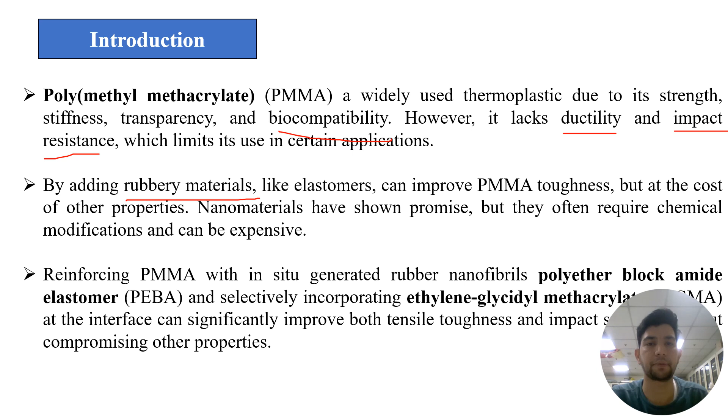So we can improve this property by adding a rubbery material like an elastomer, so it will improve toughness, but the other properties will be lost. But in this paper the author added an elastomer and also a compatibilizer, and the interesting thing was that it improves one property and the other property is not reduced. That is the good point. So reinforcing PMMA with in situ generated rubber nanofibrils polyether block amide elastomer and selectively incorporating ethylene glycidyl methacrylate at the interface can significantly improve both tensile toughness and impact strength without compromising other properties.

The main thing is that PMMA is a very good polymer, it is a thermoplastic, highly stiff, but the ductility is not good. So if we want to increase the ductility of PMMA or any polymer, we will add some elastomer. If we add elastomer, the ductility will increase, but the strength and stiffness will decrease. By increasing one property, the other will decrease. So that is the issue. In this paper, the author tried to improve ductility and never lost the stiffness. That is the interesting thing.

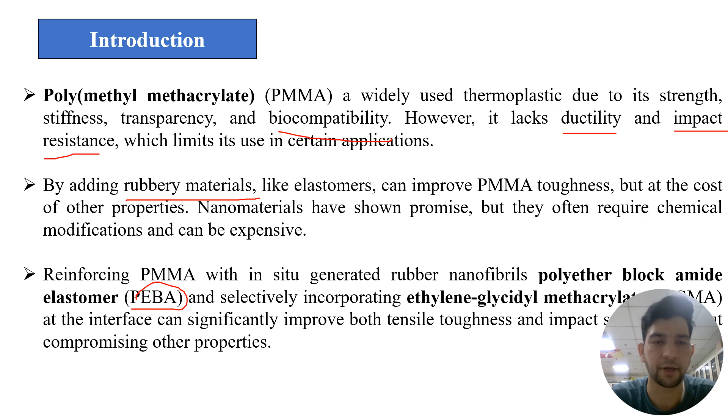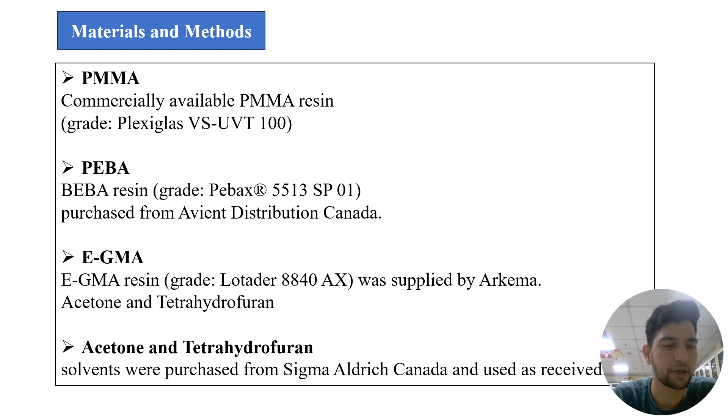Materials and method. So the materials used in this paper are PMMA, PEBA, EGMA, acetone and tetrahydrofuran. Experimental procedure. The experimental procedure of this paper is very interesting, very good. So preparation of nanofibril composite and blend. In the processing, in the first step he used twin screw compounding. This is the twin screw extruder, having a 27 millimeter screw.

Okay, so first of all he takes PMMA, PEBA and EGMA. He dries these three components at 90 degrees centigrade for 48 hours, and after that combines these three polymers and adds them. Okay, first of all let's explain this thing. What is this? This is a twin screw extruder. We are using this to make a polymer blend. In this portion, this is the feed hopper. We can add the material which we want to melt, so we add the material here.

Furthermore, it comes to this barrel. This barrel contains the screws. These screws are rotating and mix the material with each other well. This barrel contains heaters in different portions, on both sides. It is cylindrical, so the heater is around the barrel. Different heaters have different temperatures. At the end, this is the extrusion die. The polymer which is made will be removed. So finally we understand what this is and how it works.

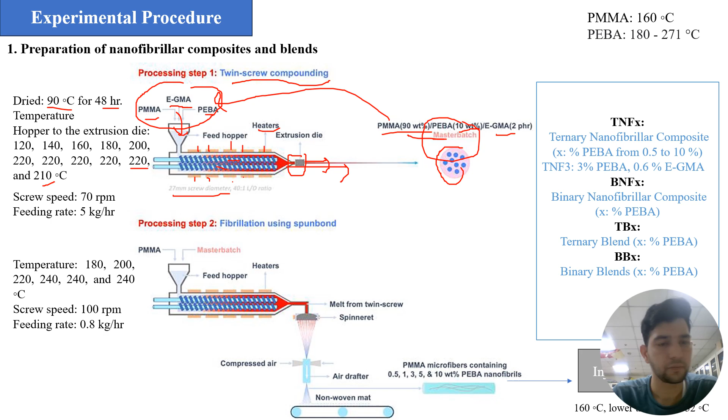So in the first step he tried to make a master batch. In the master batch the concentration of PMMA, PEBA and EGMA is different, and this concentration can be controlled from here. So he makes the master batch, and when the author adds the sample here, the screw rotates, which is measured in RPM. The speed of the screw is 70 RPM and the feeding rate is 5 kg per hour.

After making the master batch, he tried to make fibrils using a spun bond system. This is the same screw extruder, but they have this portion where we convert spherical droplets of the minor component to fibers. That's why this is called a spun bond twin screw extruder.

Okay, let's talk about this. The obtained master batch we first dry at 90 degrees centigrade for 48 hours, and also PMMA, and then the same process here, we add to the feeding hopper, and the temperature ranges from 180 to 240 degrees centigrade. The screw speed is 100 RPM and the feeding rate is 0.8. So after melt mixing, the polymer blend will go out.

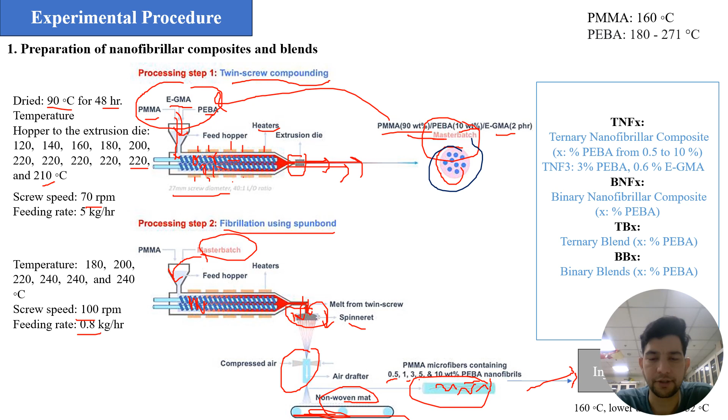Here actually the picture is there, the video is there, so that's why it is hidden, but I will try to explain. This is injection molding. The author does it at 160. There are 3 components, but the main components are 2, PEBA and PMMA. PMMA melts at 160, while PEBA has a higher melting point, so it will not melt. So the PEBA fibers will not be disturbed, while PMMA we can reshape. So he made many samples.

First of all, TNFX, ternary nanofibril composite. It contains 3 components. X represents the percentage of PEBA from 0.5 to 10. If we put 3, it means 3% PEBA, 0.6% EGMA, and the remaining 97% PMMA. BNFX, same X represents PEBA percentage. Binary nanofibril composite means it contains only 2 components, PMMA and PEBA.

And TBX, X represents PEBA, and this is a ternary blend with no fibers. And then BBX, binary blend with X percentage of PEBA, which contains only two components, PEBA and PMMA, and no other component like EGMA. Okay, here a question arises: how did he make these?

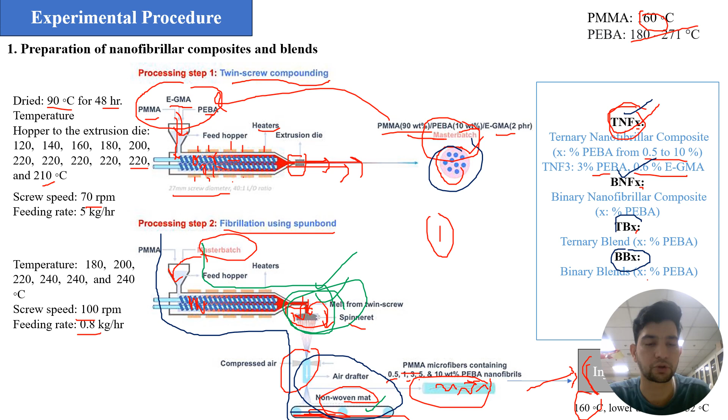If he combines with EGMA and also stops here, they will contain spherical PEBA and spherical EGMA inside the matrix. But if he goes up to this one, then definitely in this portion the spheres will convert to fibers.

Actually the screen is very small, so that's why I need to look like this.

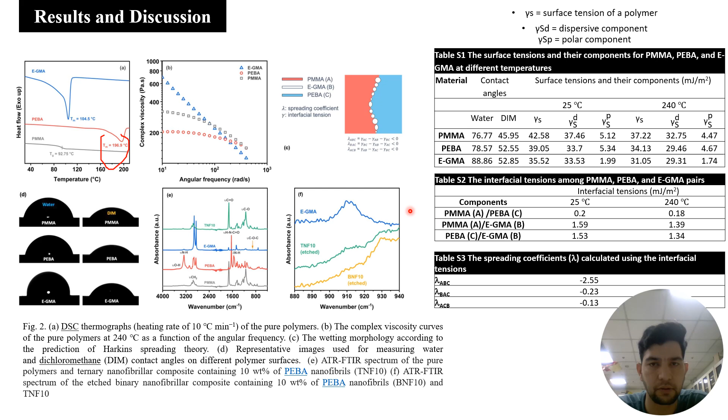Furthermore, figure 2e presents the ATR-FTIR spectrum, attenuated total reflectance Fourier transform infrared spectroscopy. This is the same graph as the previous slide; I just took a screenshot and pasted it in the next slide to explain in detail.

So these ATR-FTIR measurements were conducted to study potential chemical reactions during high temperature melt blending of PMMA, PEBA and EGMA. Figure 2e shows the ATR-FTIR spectrum, in which some important absorption peaks are identified. In PMMA, the absorption peak at around 1723 wavenumber is related to the ester carbonyl group C=O. Other peaks are related to CH2 and so on, but this is very important.

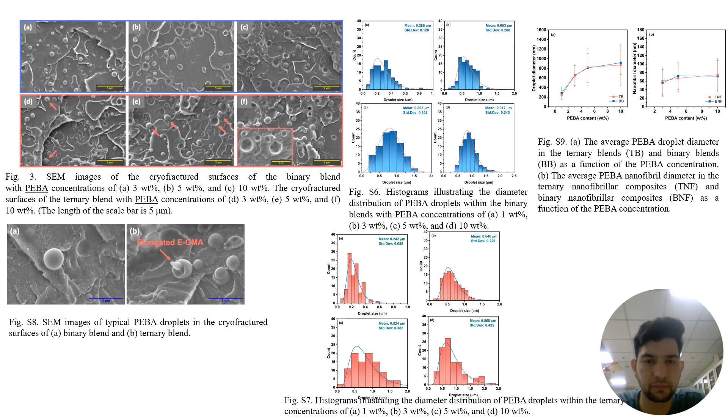In the spun bond processing, the extrudate undergoes stretching, as I mentioned in the experimental portion. Stretching and rapid cooling by high velocity cold air cause dispersed droplets to deform, elongate, and coalesce into an integral fiber morphology of high aspect ratio fibrils.

The extent of the droplet-fibril transition and the final nanofibril diameter are influenced by factors such as viscosity ratio, fibril-fiber coalescence, temperature profile, screw speed, feed rate, spinneret hole diameter, and air velocity.

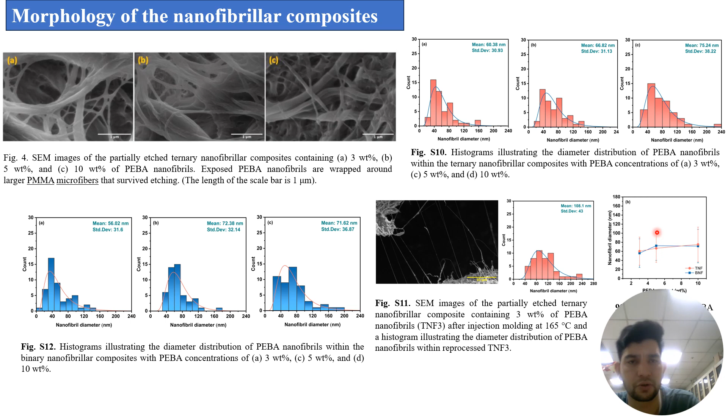Comparing average nanofiber diameters in ternary and binary nanofiber composites shows no statistically significant changes. No changes were observed. You can see here, it is almost the same, so no big changes were observed.

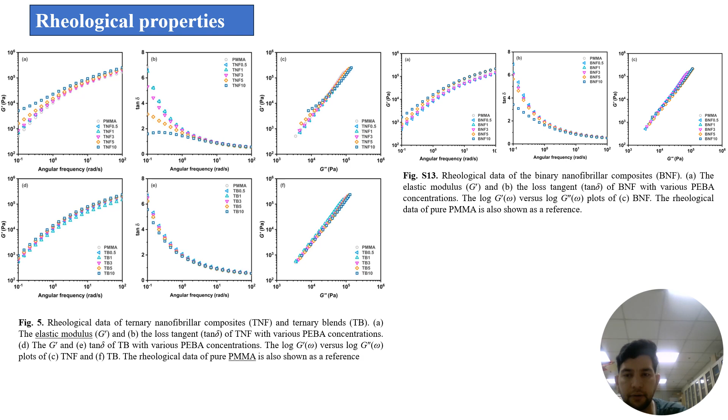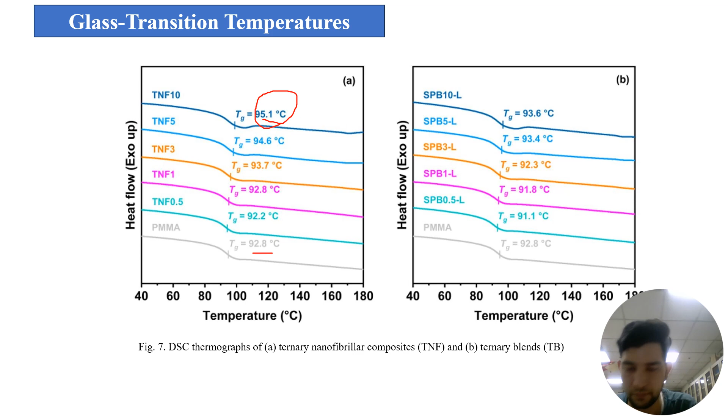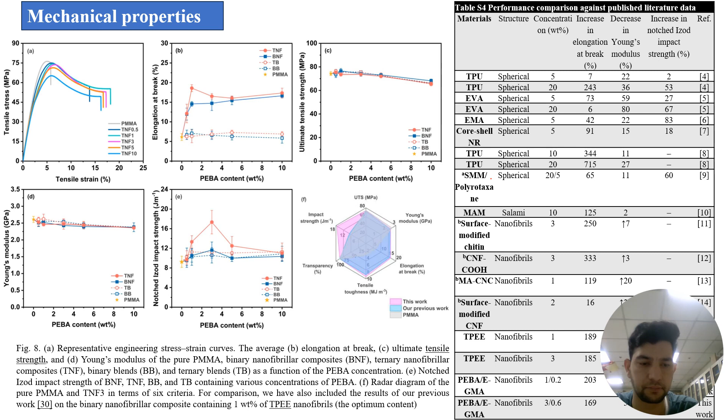Okay, I think this is okay.

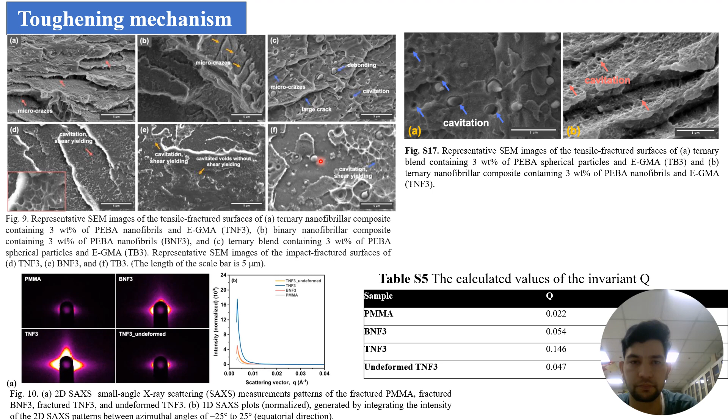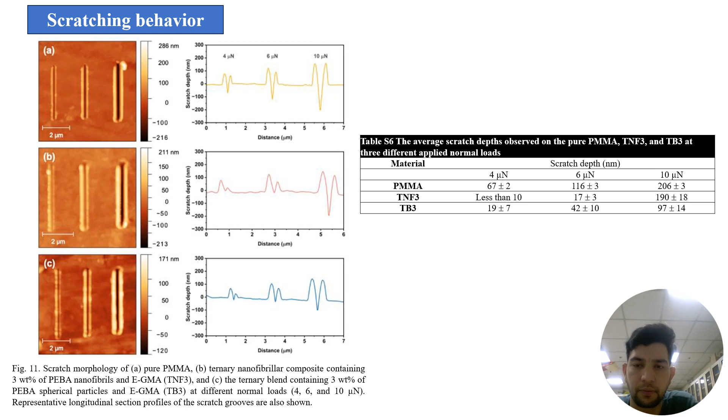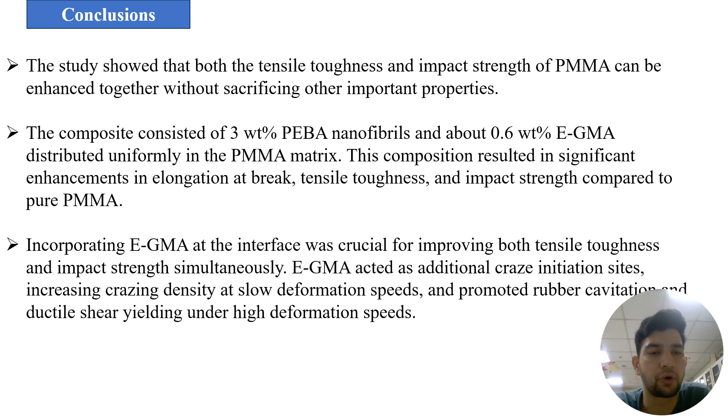Conclusion. So the study in this paper showed that both the tensile toughness and impact strength of PMMA can be enhanced together without sacrificing other important properties. As I mentioned at the beginning, this paper is very interesting. Why? Because it will not sacrifice any other property, and the tensile toughness and impact strength will be improved.

The composite consists of 3% PEBA nanofibers and about 0.6% EGMA distributed uniformly in the PMMA matrix. This composition results in significant enhancement in elongation at break, tensile toughness and impact strength compared to pure PMMA. Also in some other papers I see that around 3% gives good results, especially for fibers.

The last point, incorporating EGMA at the interface was crucial for improving both tensile toughness and impact strength simultaneously. EGMA acts as an additional craze initiation site, increasing crazing density at slow deformation speed, and promoted rubber cavitation and ductile shear yielding under high deformation speed.

So the overall conclusion is the point I mentioned about the properties, that the strength, tensile toughness and impact strength were improved in this paper. And the second important point is the percentage. So 3%, if your matrix contains 3% fiber, the result will be good. Maybe in your case, if someone is trying, other concentrations will have good results, but in this paper 3% gives good results.